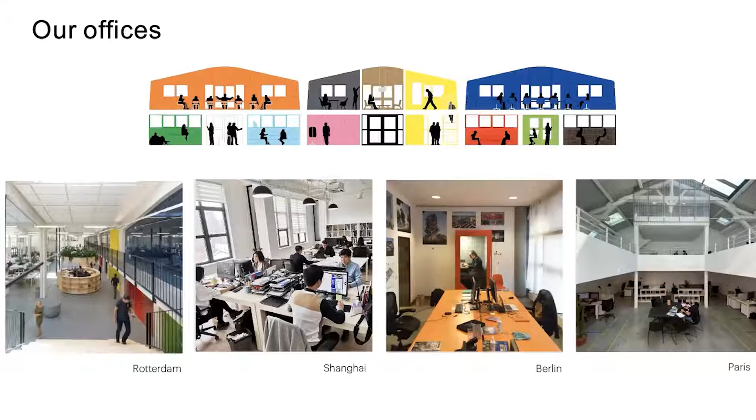So why not try to be very inclusive in my presentation as well? So therefore, I chose the topic of data, density, and diversity as some of the main drivers of our designs in many places. Actually, we are an office that started in Rotterdam, and in the meantime, we've opened offices in other cities as well, like Shanghai, Paris, Berlin, as you can see here. And our very colorful Rotterdam core offices are today also the background of my Zoom screen.

So first, the three Ds, the triple Ds for my title: data. Why is data so important for architecture?

Well, obviously—an image I often show—it's everywhere, it's in everything, we are using it, it's also partly using us, so we have to be critical about it as well. But whatever happens, it's part of our life.

Also, a wonderful image I often use—it is also in our construction world already very much. And to the right of this image, you see future-proof design and construction, designing with materials and methods of the future. It's an important aspect of that. So as a designer, I'd like to talk about that as well today.

But we are, of course, fully aware that we are in a data-driven world already. And hopefully it helps to improve our construction world, because I must say, it's a conservative world and it is often lagging behind. It's hard to change standard ways of working.

Now, our office started 28 years ago, and from the first moment on, thinking about information and incorporating it into our designs has been a very important aspect for us. It's maybe a wish for this pragmatism also that I think Martha was talking about.

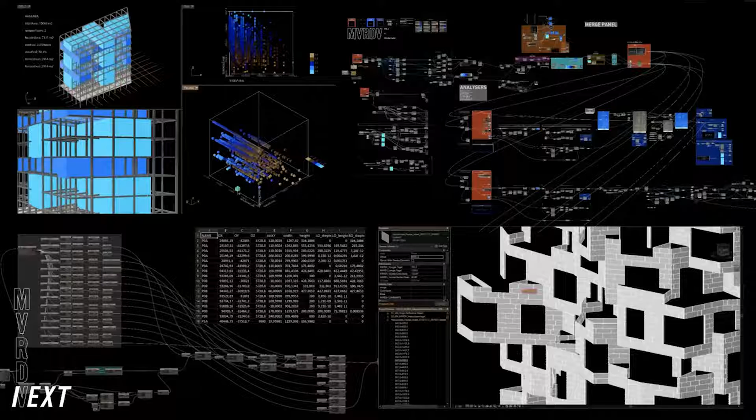Because none of us—I wasn't even in my student years using the computer, only at the very last moment it popped up. And there's many generations of older architects that haven't even been introduced to it. And nowadays we have generations where, well, I guess even toddlers already have screens in their hands today. So it's a really rapid paradigm shift we are dealing with, but it gives us wonderful opportunities as well.

The second D: density.

Why do we have to think about density? Well, the Netherlands is a densifying country, that's probably how it started. But we know that the majority of the world's population is nowadays living in cities. So how can we make our lives agreeable and nice?

Cities are maybe only occupying 2% of the total land, however they're producing our wealth. That's good, one could say, it's a sustainable way of using our land. But they also consume a lot of energy.

Cities, but also the construction industry, unfortunately, are producing a lot of greenhouse gas emissions. We as designers can play a role in limiting that to a large extent. So there is our responsibility. But also...

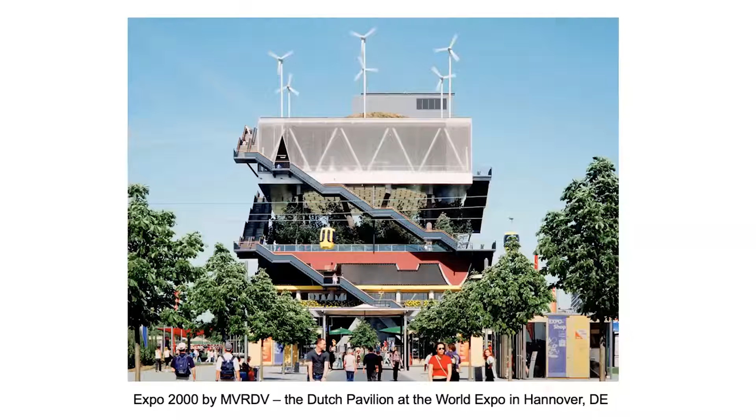I always show this image in my lectures. That means we have to think inclusively about our designs. We shouldn't limit ourselves just to 4 walls and a roof. We should think about materialization, about energy, about maybe creating cycles.

As Imagineers of the future, in 2000 we built this then-hypothetical pavilion at the World Expo, which nowadays already looks a bit out of time in a funny way, because a lot of things we did there that seemed spectacular are now common practice, with high green on buildings and energy-producing buildings.

The third D is diversity, which I want to show in my little lecture, and diversity is also for me personally an incredibly important topic. We are all humans, we all have our common needs and individual needs. We need to think about the needs of those who can't speak for themselves.

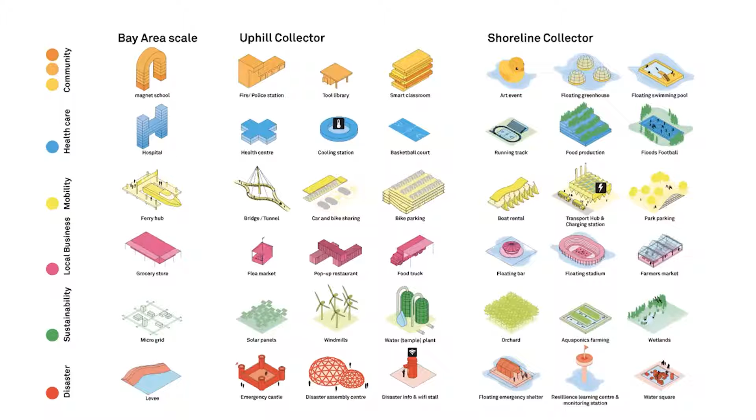We know there can be earthquakes there, but there's also the threat of sea level rising, and sometimes too much water coming from rainfall. They have fires, and the idea was to develop a catalog of facilities, because there's also poverty in the area.

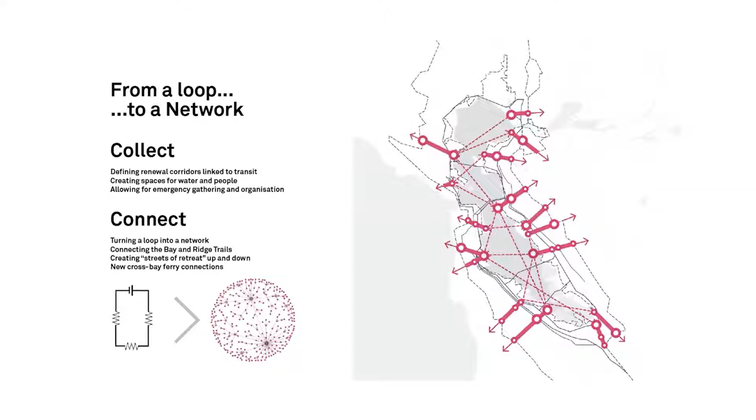Our idea was, let's make more connections and let these connections be made together with the population of the different communities living around the Bay Area. These new connections could help make the whole area more resilient against climate change, poverty, and all these kinds of things.

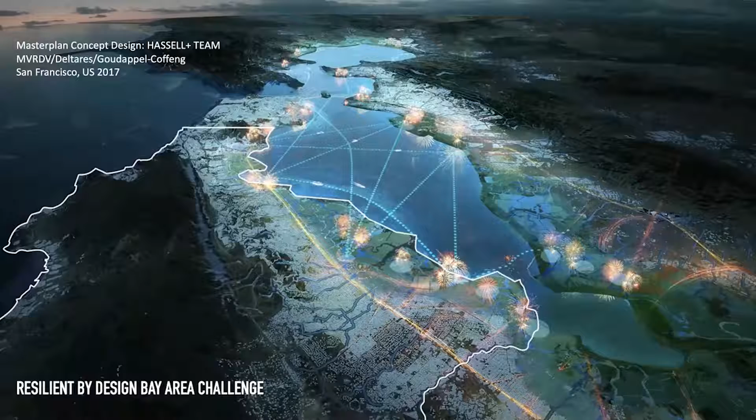So basically, we wanted to devise a network of connectors and collectors—connectors between people, more different modes of transport, so as not to just rely on the car and the one highway. When there's one crack in this highway, nobody can get anywhere anymore.

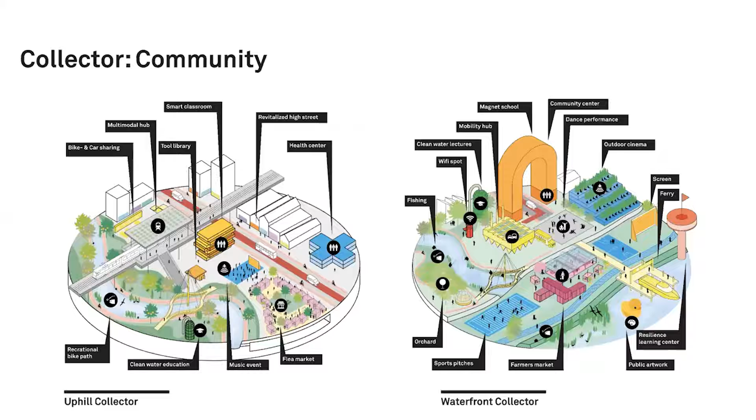But also collectors to collect the water and move it downwards in a better way. Together they could form a way to escape to safety in times of disaster. And all these new connections could also be exactly those points where we could make new community facilities, selected together through communication with the population.

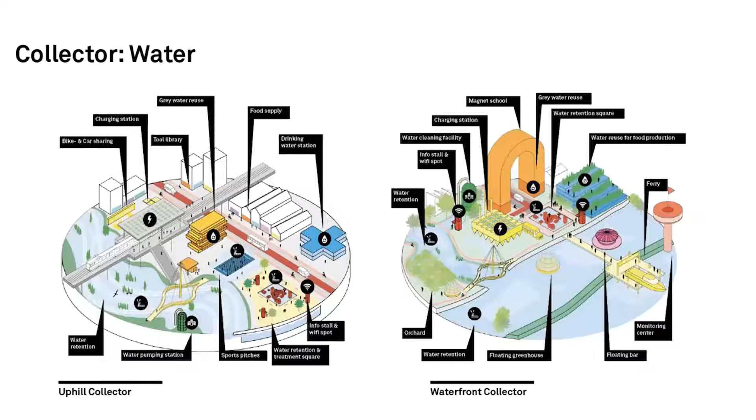So you can see that the whole system of water collection and connecting people could handle and deal with, and make a whole area more resilient against disaster and climate change.

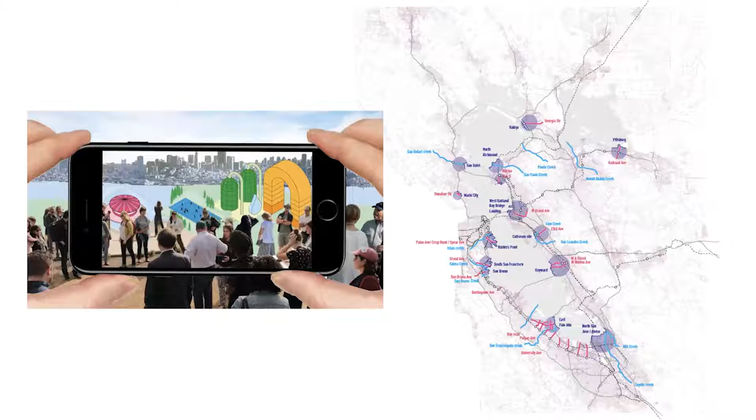So altogether, as designers, we are designing a systemic way of thinking, learning in fact from digital networks, to make sure there are much more shortcuts and ways out of and into the system, and at the same time offer possibilities for communities to intervene and select their own facilities around these new networks.

This is really huge scale design. So here you see some of those communities around the city of San Francisco.

Another thing with communities, diversity, and the digital—we experienced this in the past year when we were invited to make a master plan for this area in Kansas City. We were invited by the Office of Port, who have a wonderful track record in very interactive, community-based design processes.

They invited us, but it was also during all kinds of lockdowns. We were not able to travel, and locally the people weren't allowed to meet up a lot of the time. I show this project because I think, like the previous one, resiliency against disaster and flooding is a global problem.

The same is true for this area called Armourdale in Kansas, which is completely surrounded by industry and has a problem with poverty and negligence—something we find worldwide in cities today. There's also again the risk of flooding; you can see this big river surrounding it.

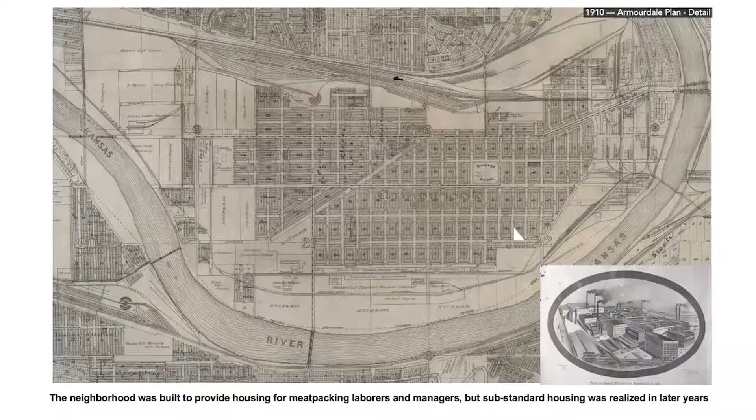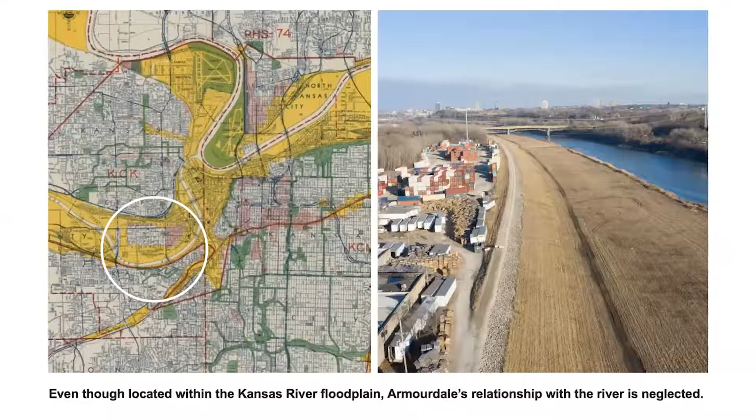It was once developed as a nice kind of worker area for the factories, to make sure the laborers and managers had a home. But it turned out to become a very isolated place, and the industry became much more important. The people were more or less left behind, and even their relationship with the river was completely neglected.

So this is the diagram of what was happening there, and you can imagine that it led to extreme difficulties as well. So how to deal with this?

The neighborhood is sort of completely enclosed and bordered, almost strangled by the industrial complex, leading to a lot of poverty. On the other hand, it's a community with a very strong identity and still a strong cohesiveness that you can make use of when you work in the area.

And what can we add as designers to this issue? So we investigated what are all the issues that have to be dealt with and solved in some way, and whether we can help stimulate it through the organization of space, but also by empowering people to get out of this deadlock situation there.

And the most important is, of course, talking with the community. In education we have to make sure this finds a place: engaging yourself, talking to people on site, getting to know the people you're working for and with. In this case, it was done through many different channels with outreach teams on site, surveys, websites, workshops, talking to community leaders, interviewing people, having them fill out forms spread in the community. We also organized workshops about public health and safety.

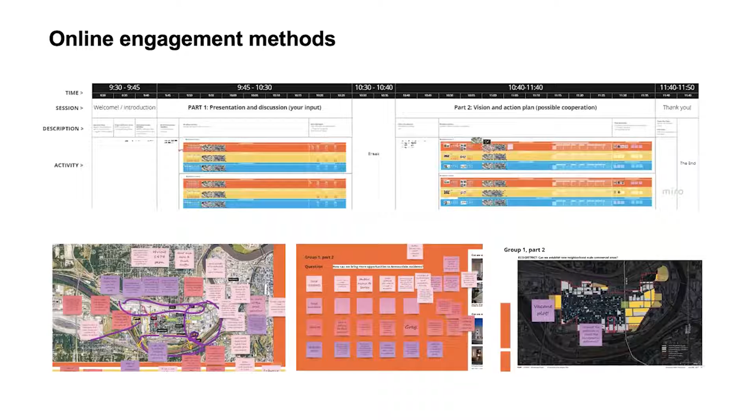And we used wonderful techniques like Miro boards to have online workshops as well. Sometimes there were markets where people from ports could go to, but we also did it online in small groups, gathering information, talking together, trying to visualize their problems using colorful diagrams and photographs and all kinds of modes of communication.

And the conclusions, I think in many places, are important: reconnect, don't forget us, reprogram, empower us. What's going on in this area? We need more clarity from the government, more interaction, green, of course, and safety, public space, community cohesion. How can you do that in a design?

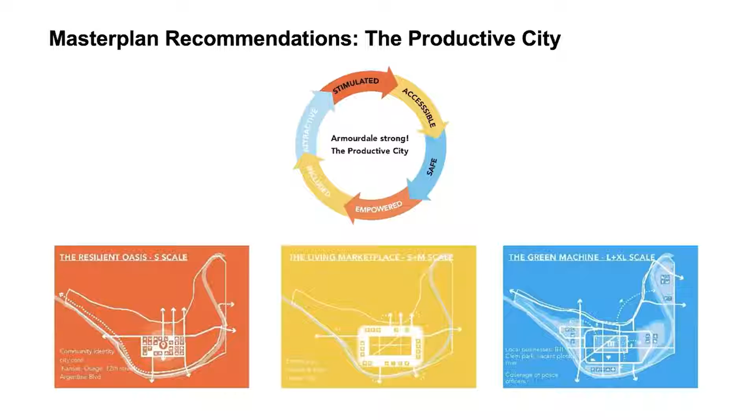What's very interesting, I think, is we come from an age where we have divided all functions in cities a lot, industry on one hand, living on the other. But maybe it's time to think again about productive cities and make interaction between work and living important again, because we can be productive in producing and taking care of our own green.

In the community, like on the left, on a smaller scale, help to build our own homes and empower people to do so by giving simple structures. We can also help people develop workshop-like situations in neighborhoods as well, to educate people and teach jobs.

And the big stuff, we can use it as well, maybe for energy, raising energy on these big factory halls, and using the floodplains for recreation, because they're not always flooded. And identifying the voids, literally, in the community.

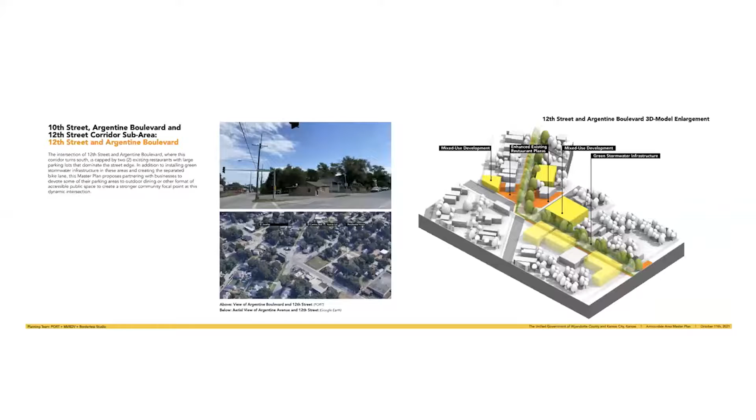We need public spaces. We need to rebuild on important spots in a community like this. We have to identify that and make sure that people not just make new buildings, but also new public spaces. And when you create housing projects, there should also be places to meet in front of that.

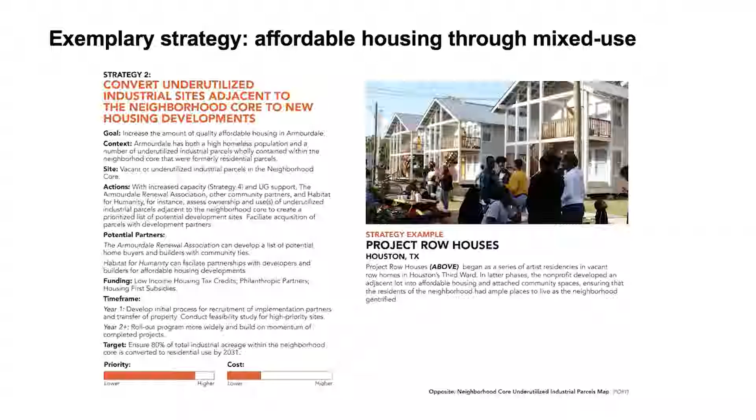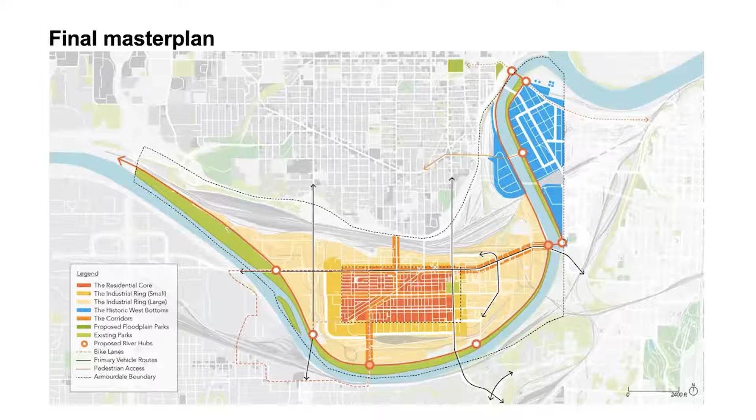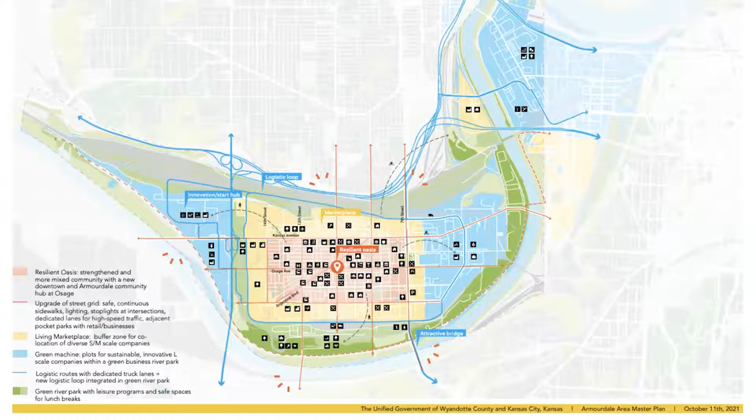Indeed, also the connectors and collectors in the circles on the waterfront, include the waterfront in the community. It can be used most of the time as a wonderful park. And then suddenly something which is like a backside becomes almost like a front side of a city again.

But this is something which works on so many different interactive levels with so many different specialists working together. Can't even begin to visualize it. I guess the best visualization will be in some years, when the community starts to function better again.

Moving on to dwelling, another scale I'd like to show you, because that's also an important place where our growing world population, data-driven design, and density come together. Data-driven design for us means that we are more and more able, as designers, to include important elements of our daily life, not just through consultancy, but also in our own design process, as part of how we create and densify neighborhoods for many of our projects.

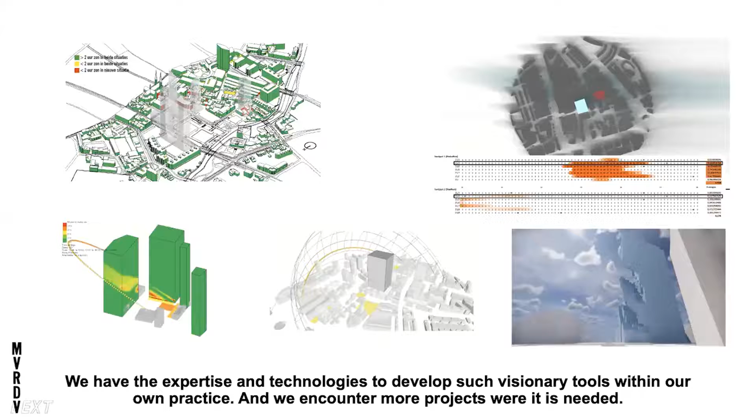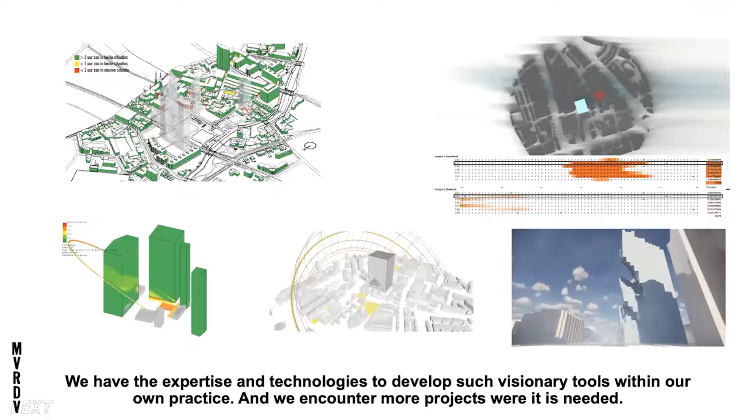Maybe you could also use it in a different way, because in some areas of the world we also need shading, not just nonstop sun. This is an interesting parameter that should be very localized when in use. But you can see how, through different techniques and applying different data sets, we start to shape our environment with sun hours, sun spots, aims and goals, how to deal with sun and create buildings that better cater to that. On a practical level, we did this on a large site in Bordeaux.

Our office made a master plan for this former railroad yard with factories and some housing as well.

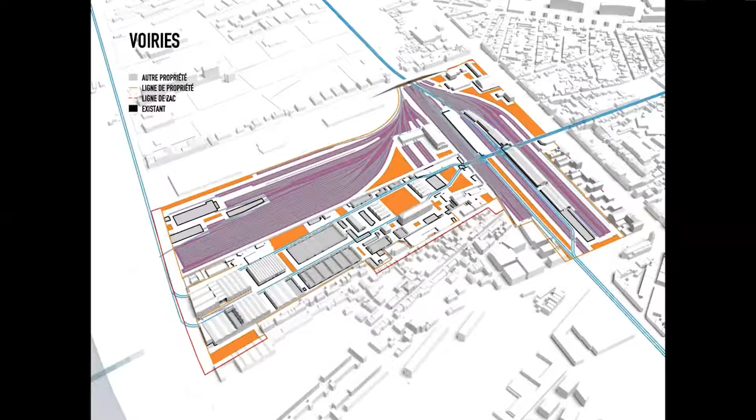You see how the different layers of data we're now putting in, it's the original French presentation. See how we can start to build buildings on the former tracks. We take out spaces to also have public spaces. We reconnect it to the streets and the context.

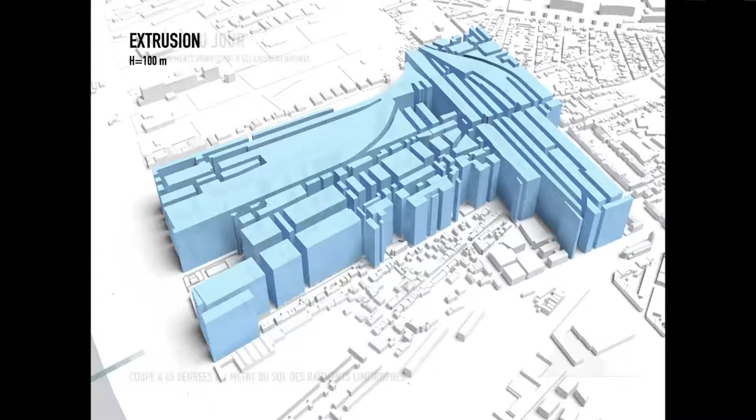Then we just start with a kind of massing, as if we start to create a model. Rough blocks are put on, and then we start to carve it out to get enough light on the streets, on all the buildable areas. Of course, there's existing buildings included.

We even put on minimum daylight measurements. We contextualize to get views and context to include the existing buildings as well and give way to specificities. 144 architects will be invited to create a really colorful, diverse scheme to fit into the master plan.

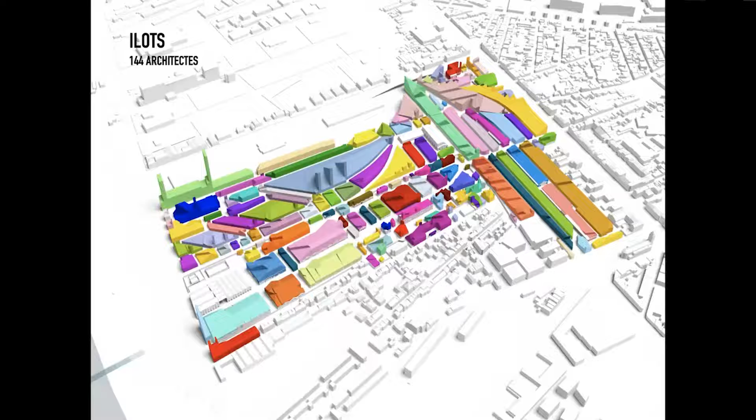And of course, we don't make massive buildings, but we're also opening it up for air and light inside as well. And we'll add a lot of solar panels and some other ways of creating energy, and green roofs also can be an important aspect of the designs as well. Not to mention underground, the water collection as well.

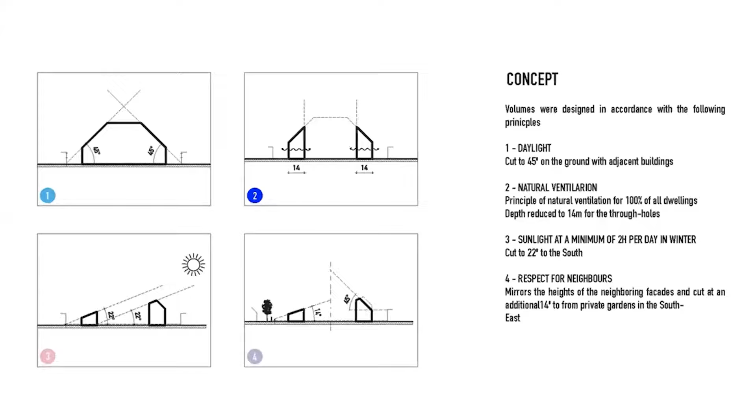So that leads to sort of manipulations of massing and careful studies of all kinds of these aspects in the sections. But it also leads to actually new data-driven design of architecture.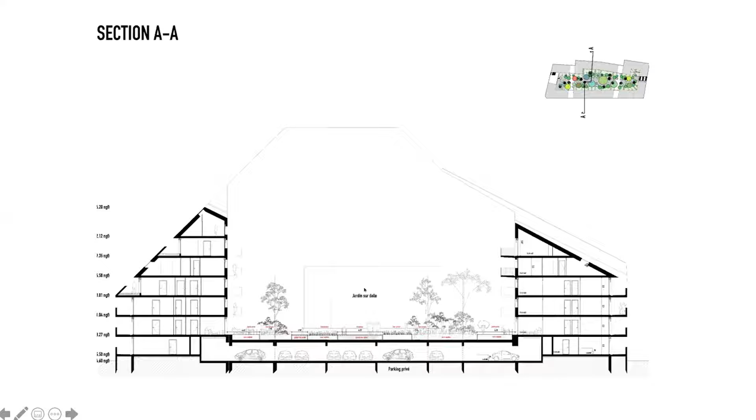Get rid of the cars, important always, but also make sure there's enough cover on the car parks to have green courtyards as well. As you can see here, in this block, of which we are also the architects, there are different types of apartments, including almost half of them affordable housing.

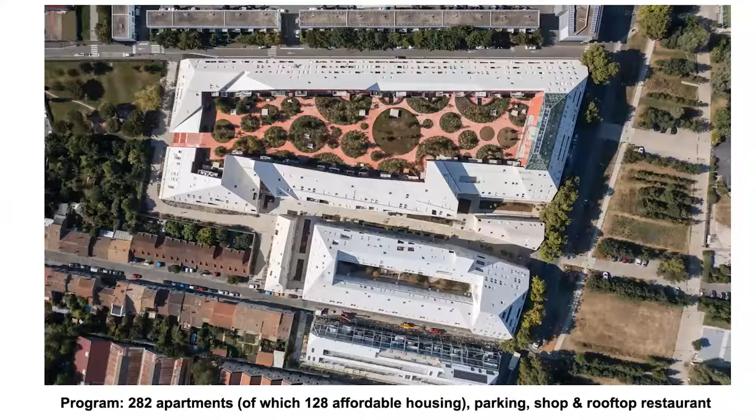There's a parking, a shop, and a rooftop restaurant as well in the glassed parts. We're opening up the blocks. You start to see the diversity, but you don't start to see who paid what for his house and in what financial structure. So that's also very, very important.

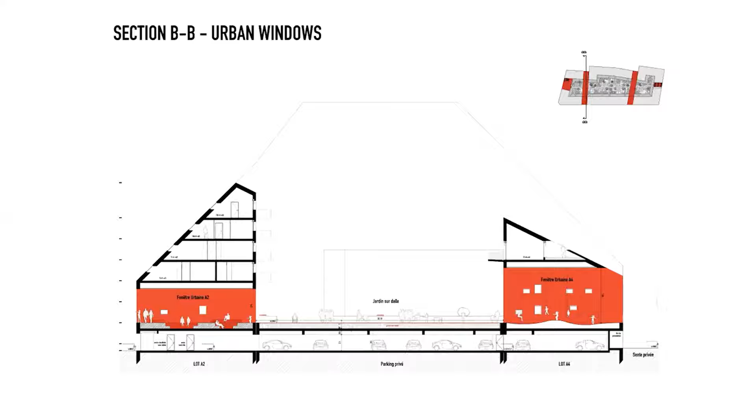And we make a lot of collective spaces as well. So some of the entrances and gates become playgrounds and covered meeting spaces in the project as well. So data, diversity, density coming together.

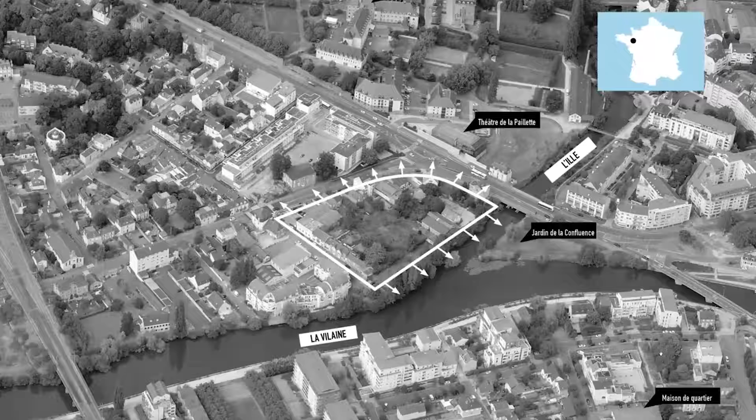And in another project in another city in France, Rennes, the capital of Brittany, some of the same measurements, densification, but at the same time allowing views through and across the project, making as much as possible outdoor spaces here and balconies and green. Again, a mixture of different financial categories, from social to mid-income and regular.

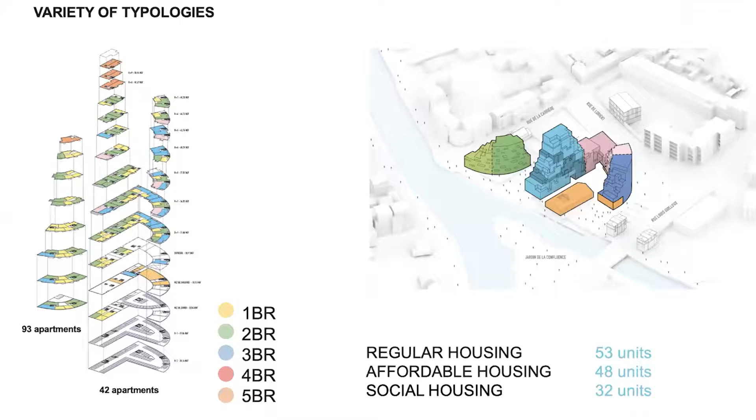Expressive shaping that leads to a very big diversity of floor plans and layouts and different types of amounts of bedrooms, from 1 bedroom to 5 bedrooms, for example. I'm not going to go through all these steps in the design, but again, this sort of shaping with information is an important aspect of how we create these buildings.

They're also wrapped around an existing little hall on this canal. It's close to the downtown of Rennes, a historical place. And here you see how actually everybody in the project will have a wonderful view, have a balcony, no front or back rows here in this project.

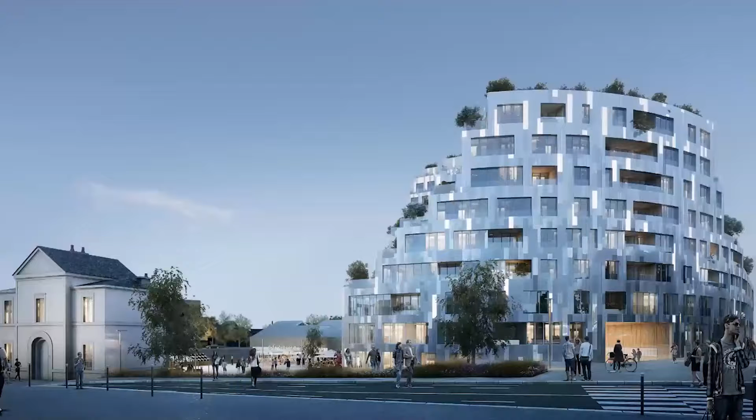And again, this permeability with collective open void spaces, which always allow a fantastic place also to meet, to organize a neighborhood or a block party or meeting as well. So it's just void spaces, but they allow, and it's under construction right now as you can see, a nice public waterfront, of course it's not privatized here. Allow for little places to meet in your project.

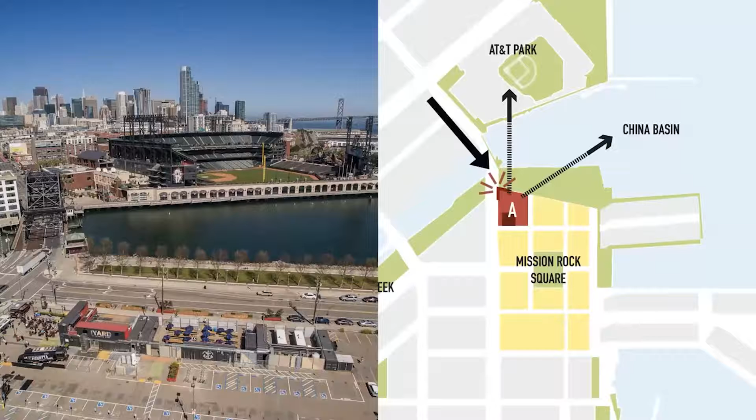Moving to a different continent in the States, a project for the San Francisco Giants, their parking lot being converted with different architects. Here it is actually a couple of months ago. It's already much further ahead in the same Bay area. Indeed, a flood park in front of it now to prevent it from being flooded.

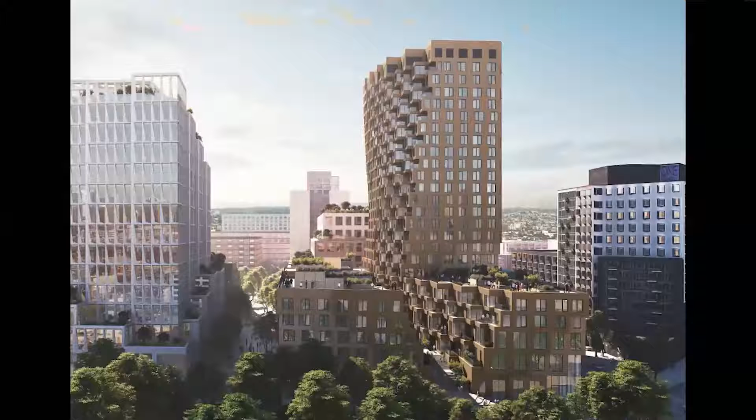4 architects, studio gang coordinating, Henning Larsen, WORKac, and us with the reddish building in the front tower. But we opened it up, we carved it out. There's offices in it as well in the plinth and retail, but also at the heart and at the roofs, places to meet and to talk to each other.

Again, with different floor plan types for different types of people, also affordable.

This is very important for the San Francisco Giants. They say all our fans should be able to live in this complex. So it's really something that the client should also take care of and include in the programming.

So this one's under construction. I'm not going to talk about it too long, but it's also very mixed with a plinth of retail, some offices, living all together in a quarter.

And yes, we also made a project in India. We made several projects in India, a lot of them about public space. But this one is for housing in Pune. This is the building. There will be some more, I think, in the future.

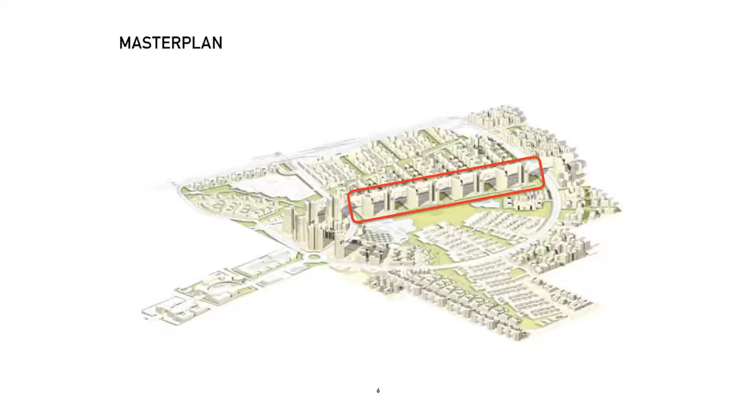As you can see, quite a particular organization. The original master plan asked for a couple of towers, which we thought was pretty isolated way of living. So we devised a way whereby we could create a bit more, even with tall buildings, a sense of community in the area. And we also talked with the client about, again, the mixture.

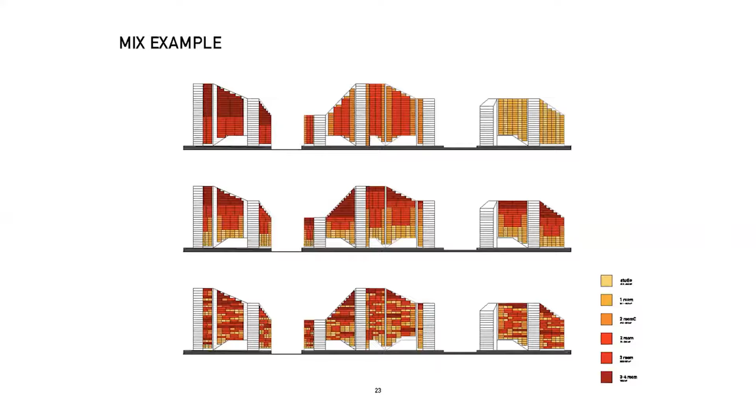I think the different colors represent the size of the apartment. And we started to negotiate it, and the marketing team of the project also helped to diversify and mix and mingle. Because I think if you mix and mingle different housing sizes, you also get different kinds of people in your buildings. So here are eight apartments, but they're all very different in size.

So you can imagine that different types of people, like singles and couples and families and extended families, would all be living in this particular part of the building, for example. And you also notice, of course, it's put on top of a car park.

There's some half enclosed plazas and facilities, but there are also these openings in the project, these sort of collective living rooms, because if we make a building so large, it doesn't really help just to make a couple of openings on the lower levels. We really wanted to integrate them as well on the higher level.

So you will be able to meet some of the people from your surroundings and area in particular places, which also have different functions, like collective living rooms in the project, including, of course, some playgrounds, some places to meet and talk.

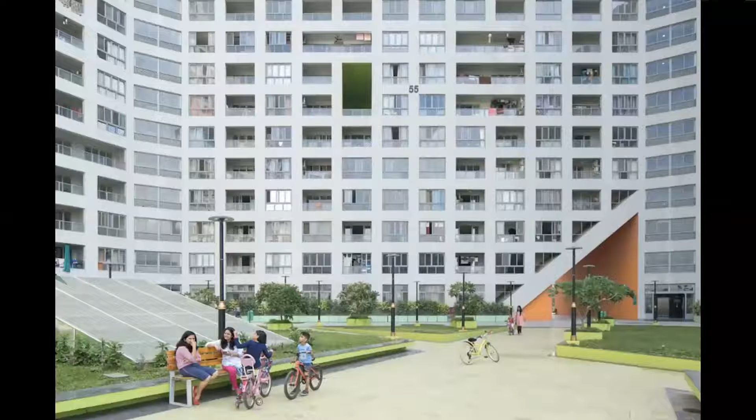And also, again, at the lower levels, there's some nice outdoor design here, but there's also covered spaces like this one here, where you can see a class moving towards the playgrounds. Yeah, just a place to sit and meet and hang around in the shade, of course, as well.

So you can see here how this building is. Yeah, everybody has balconies as well. Things we try to get in every project all around the world.

I'm continuing, I'm a bit behind schedule, so somebody should give me a sign on how much time I still have left. I'll just keep on talking. Not an issue, Nathalie, I'll do that. Please continue. Okay, thanks. Well, I'm in the third part.

I think we also have to talk about work in another way. We had in Armourdale, of course, already the industrial, let's say re-industrialization, bringing work in a nicer way back into the community, having workplaces for everyone.

Many of us are also office workers, of course. And so much has changed also in the way we are thinking about work. It has been in the past, but it has even been accelerated in the past two years.

We were very happy to make this building to the right called Werk 12, which is like an office workers club in a way, to liven a neighborhood near a station in Munich, where there will be a lot of offices built, but also a lot of housing built.

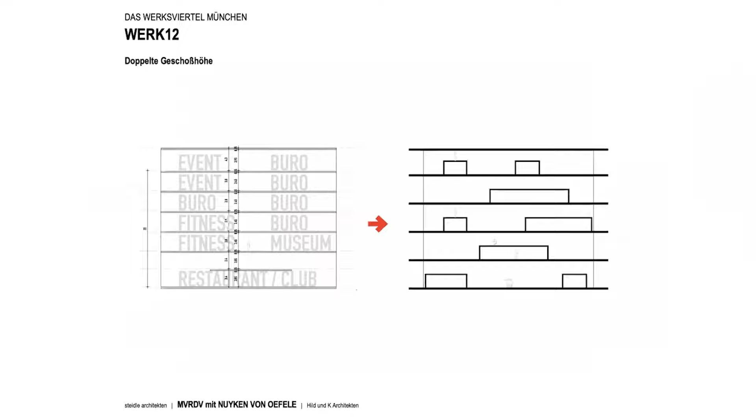Including offices, event spaces. And we even know, of course, there will be different floor to ceiling heights there. So we suggest sometimes to take this double height as the point of departure and put other functions in more as infills that you can remove. You have different lifespans in the construction of a building.

This is really the open building system. And it can still be very fun. So it looks kind of rough and ready in a way, but it can also be a lot of fun if what's happening inside is really showing off and buzzing on the outside.

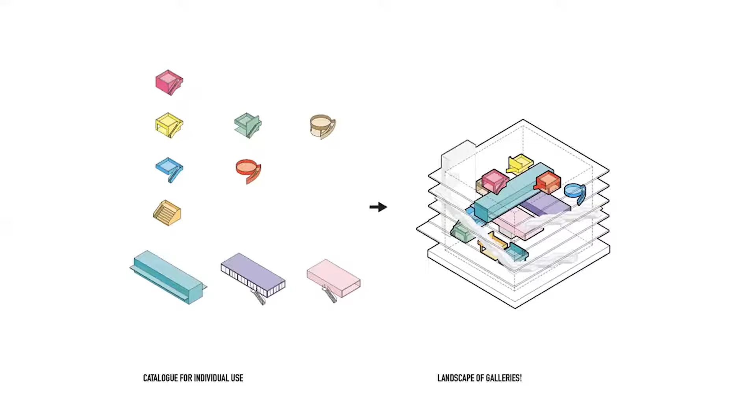This is a building with even multiple points of entry. These are the infills I was talking about, almost like pieces of furniture for functions that need some closing off in the bigger spaces.

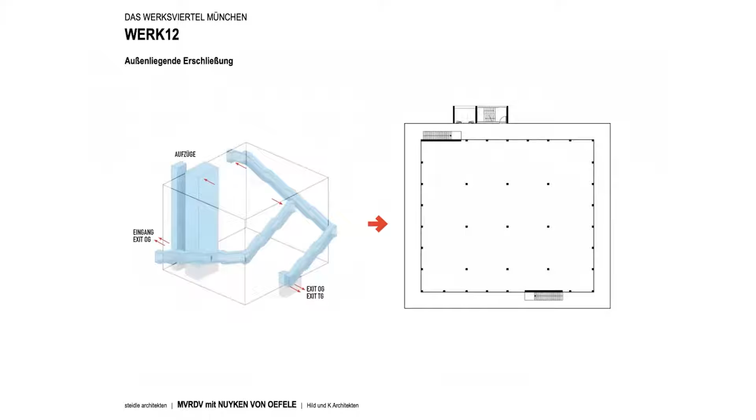We have a point of entry, which is kind of a gallery, but the escape routes are also alternative entry points so you can really access the building from all kinds of different sides. The sports inside, offices, swimming pool, restaurants. It's a really neutral floor plan with columns and these galleries. Each floor, like the ground floor, has two floors because there's the basic floor and the infill on top of it, all with the idea that it can also be flexible again at some point.

Continuing, we even managed to include a swimming pool in the equation. Of course it's also an attractive building where the people living and working in the area will meet and come together, to also offer space for the nicer, relaxing things of life. It's like a kind of commercial community center, one could say.

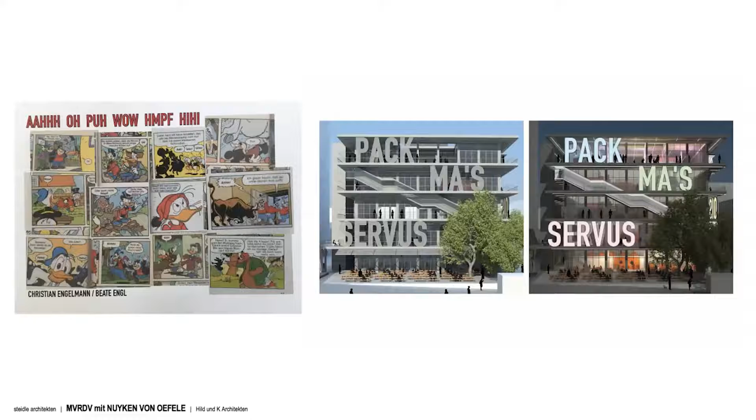You've of course been noticing all these letters. It's part of our original competition design. Two artists, Engelmann and Engl, said it reminds them of what you see in Donald Duck, these sorts of noises that are sometimes made, and why not include that on the facade, because it's like a universal language. It's really wonderful to have that now in our design.

We collaborate a lot with artists because we think, on the one hand, we try to be very basic, neutral and transformable in our designs, but we also need joy and fun in our lives. Often the artists and designers we collaborate with, and the use of color, are a very simple and very cheap way of making life nicer, and are part of our designs.

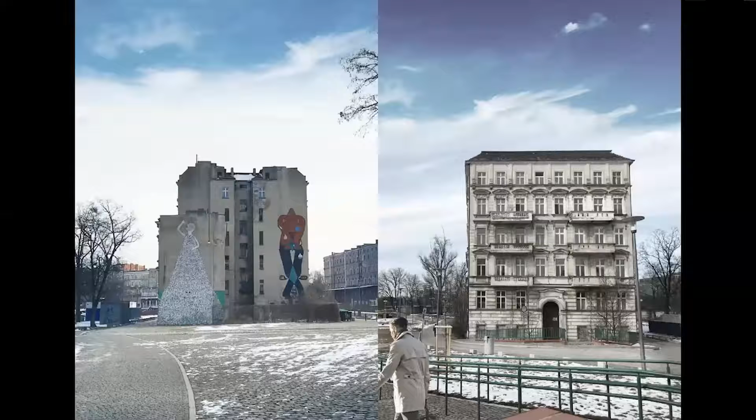So the second working building I'd like to show you is this one, which starts in Wrocław in Poland, on an island where the Nazis in the Second World War retreated and used it as a kind of bastion. Everything was broken down and shut down, and there were just ruins left in the middle of the city for a long time, until we were asked to deal with this one of the last remaining fragments of a building, which, by the way, contained fantastic street art at the same time.

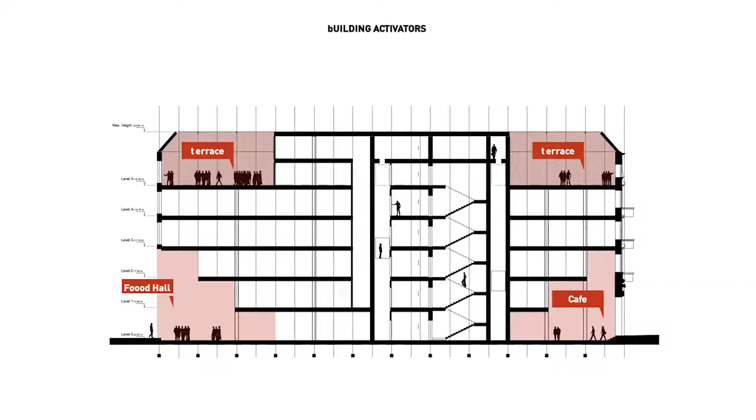We added a commercial program of collective co-working spaces, restaurants, and meeting places, while also acknowledging that it's really a central meeting place in the city. So not closing it off - in a way an office is a closed shop for those not working there, but in this case all the pink areas are retail, cafes and meeting spaces where there will always be people entering.

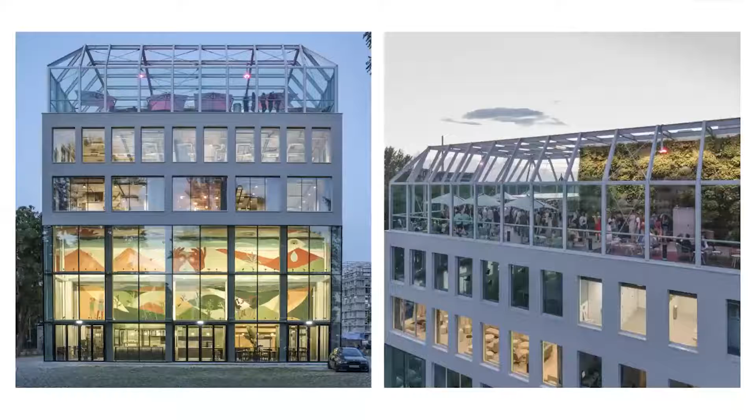We did that on both sides, the new and the old part of the building. You see a bit on the roof here how we opened that up. At the bottom, a new hall where you see the old and the new - this is an event space - and on the other hand our new part, with a fantastic rooftop cafe, green roof, and a wonderful space to eat and drink.

Co-working offices are very important. I think nowadays many of us are freelancing or working alone, but we also like to meet again, so co-working is becoming ever more important in the city, and finding places for that. But also a social place - you work there, you drink a coffee together, and you meet not just indoor but outdoor as well.

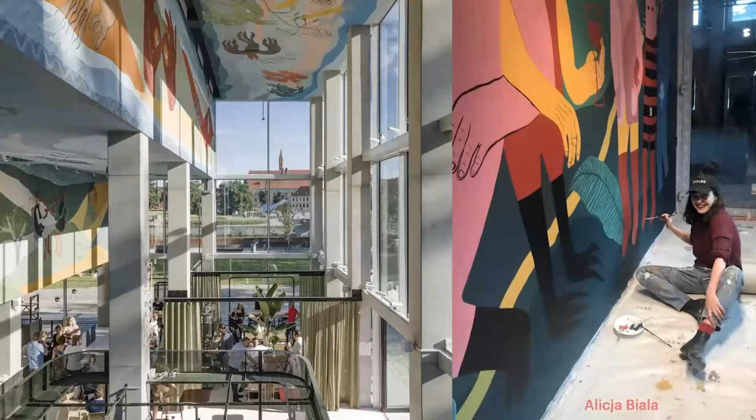Here you see a bit the island situation. At night, actually, the youth takes over in Wrocław. So at daytime people work there, at nighttime people have a lot of fun there as well.

A third office building in Colombo, I thought I have to show you this as well. We worked in Sri Lanka on a new office building in an area that's rapidly transforming. There's still some of the old remains, a factory owned by the family of our client that transformed it partly into this nice area to go out as well. But there's also all these towers popping up in the city at the same time. So what we did is we tried to connect with our scheme these alleyways with the new nice activities to the new building we also put on site, but also save space as much as possible because there's still a lot of green. And we thought in our site, we have to find spaces for that as well.

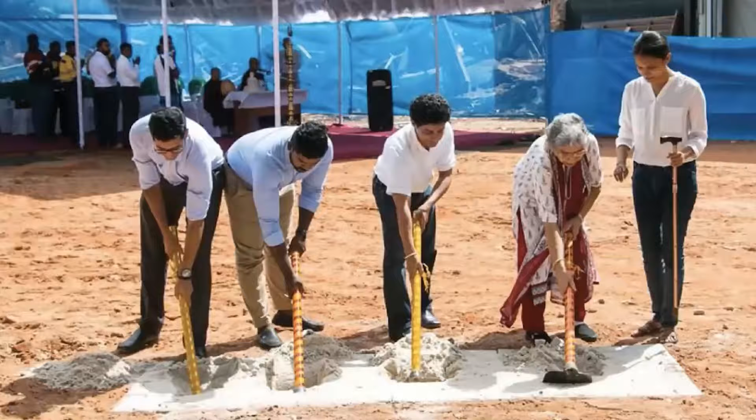The client introduced a rooftop as well, and on the first levels we have some car park also on the ground. But we designed it in such a way that it can also be converted to offices once the car is less in use, so the floor to ceiling height is higher. Currently we green it, but it's all ready for transformation. Then you see, of course, these closer and opener parts of the building. You see the ground floor and the greenery that we added, and again a lot of artists and architects involved, making these wonderful artworks and interiors.

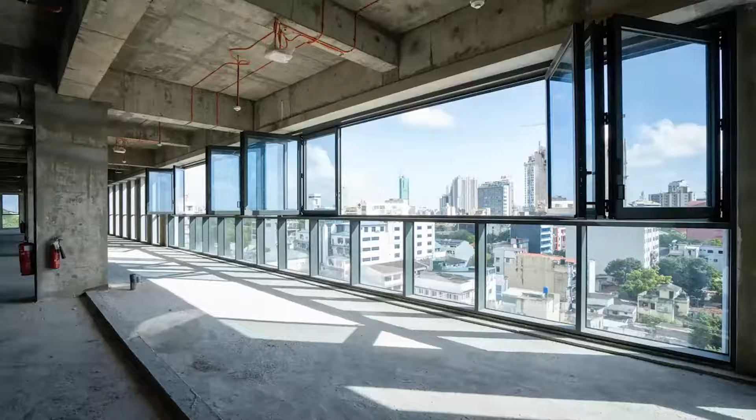Here you see the office floor currently used as car park, that's how I would like to label it, with the provisions for the green. Each office, this is the rough, unfinished version, with a lot of opportunities to still open up and create maybe verandas, not to be totally reliant on air conditioning every hour of the day, and indeed outdoor facilities as well, which could also be this sort of co-working space, and a building that also communicates at night and is lively for the neighborhood as well.

Right, and some other images from the context. I'm moving on to the last buildings. Again, I'm just continuing until somebody stops me.

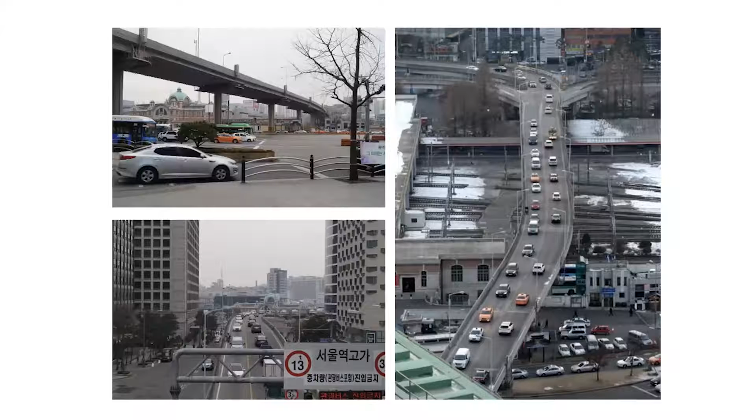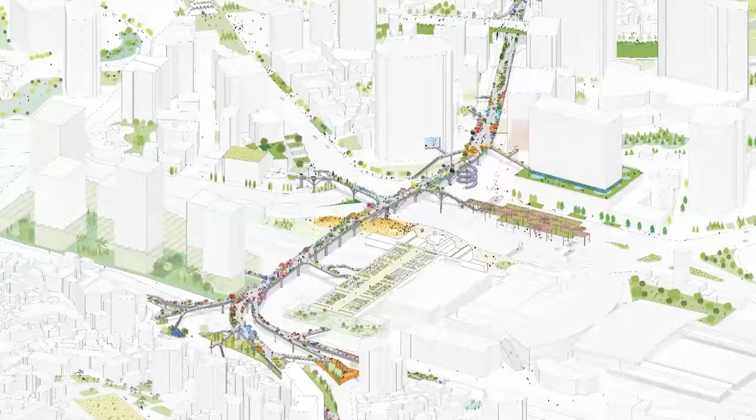Last but not least, I'm going to talk about some public projects. One in Seoul, where really in the heart of the city, across the tracks but also highways, a piece of highway was actually taken out by the city, and they said we're going to just take that out and transform that from a car-infested place to a place where people can bridge this incredible gutter of infrastructure. My colleague Winy designed this whole wonderful park on top of it, which acts like a sort of nursery for plants in the city. A nursery of plants, and when they have grown enough, they will be put in other places in the city.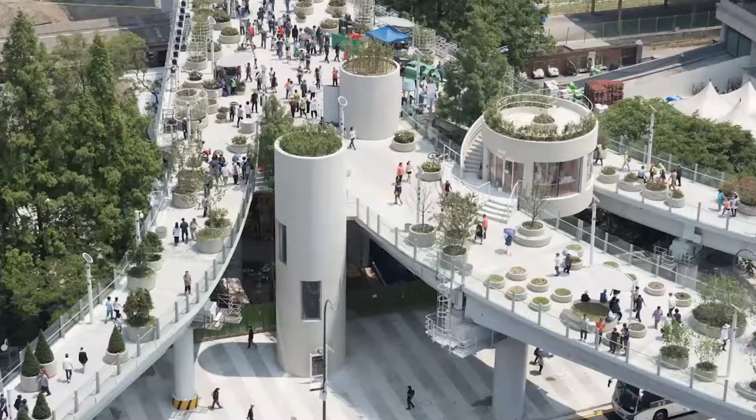It's like a catalog of local vegetation, and there's all kinds of pavilions. The design was basically the park and all the elements to get up and about and around this place. And it has, like its big ancestor, the High Line, an incredible, powerful impact on all the real estate in the surroundings. But also you suddenly see that people are actually living there in that area, and they're not in their cars, they're not shoved aside on the streets, but they're taking over in a wonderful way.

And through these new connections, this whole area is revitalized. From just being offices and shops with people living on the outside, they are back in the center of attention. Of course, the green is fantastic as well, adding shade and better conditions for living in the middle of a huge city, with water as well, and also safe at night and accessible.

The French had this saying in the 60s that under the pavement is the beach, and the revolution started. But under these pavements, we've actually moved it around now. No, the beach is floating above the streets. It's in the sky.

Again, community building is incredibly important. I was talking about mixing different types of people in buildings. In this community in Copenhagen, Denmark, the community said, we're going to densify. There will be lots of new people living here, but there's also people from the really old neighborhood, from the 70s, and all kinds of workers. Let's build a community center right in the middle of that. This is the community center and a park, with a car park underneath.

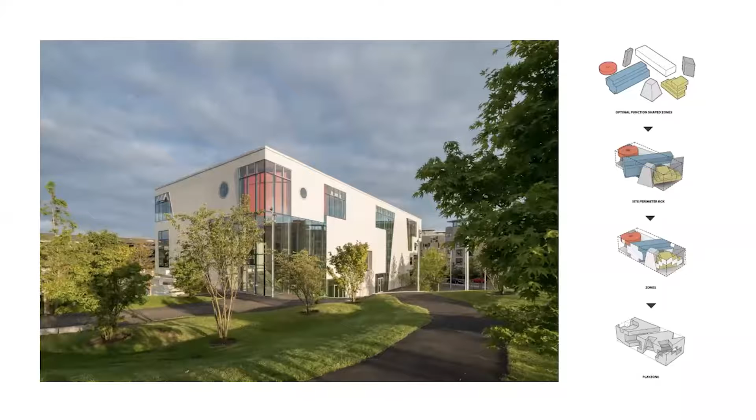In this community center, it's all dedicated to healthy living for your mind and your body. There are different kinds of programs inside: a bit of a startup place, a communal kitchen and cafe.

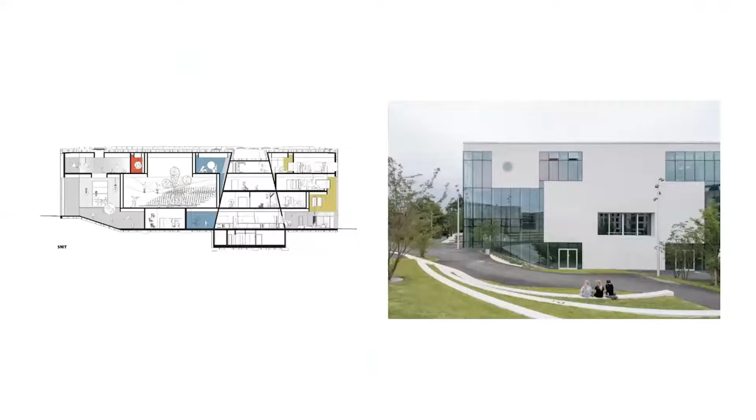You can play there. It's very dark in Copenhagen already at 4 o'clock in the winter, so children can go inside. People can meet, have yoga classes, move - that's also important. Climb, have fun. So all the people in this community from different backgrounds will be meeting each other inside and outside, with a small amphitheater as well.

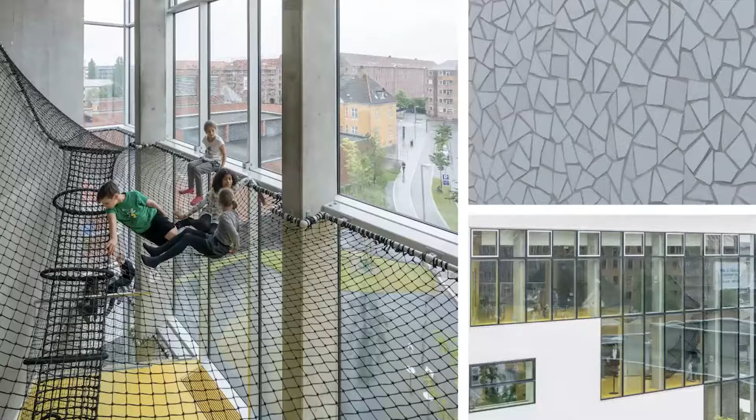So the building is really interactive, one could say. Promoting healthy food and movement is important, because so many people have issues nowadays with their weight and with not moving enough. This is just on a Saturday - on a weeknight, Tuesdays, it looks completely different when people come in for classes and yoga. It really acts as a kind of central meeting point, with markets and fun.

But the museum had a big problem: all their Rembrandts and Van Goghs and Salvador Dalis were in the basement with flooding all the time. We also have a climate change problem, rain, groundwater coming up - there's like a €1 billion crisis there. With the help of the public sector and private collectors, a new archive building had to be made, but the museum director had a wonderful idea to turn it into an archive you can actually visit and use.

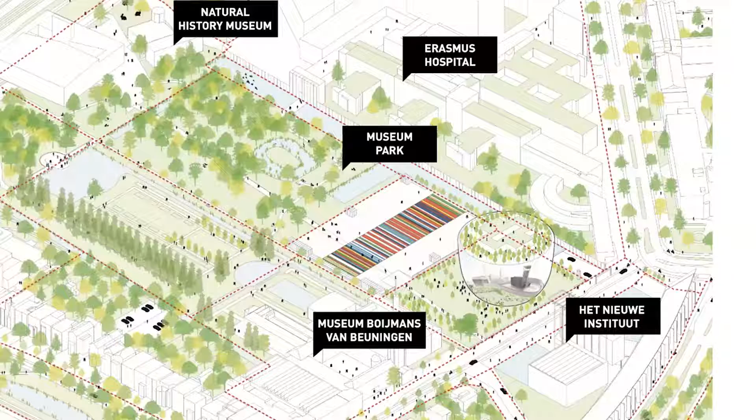We also introduced an accessible rooftop to it as well. So in the basis is, of course, a very closed building with archival spaces that have to be very safe and climate proof, so that the art is protected. But we also opened up the heart for a wonderful Wunderkammer, a place of miracles.

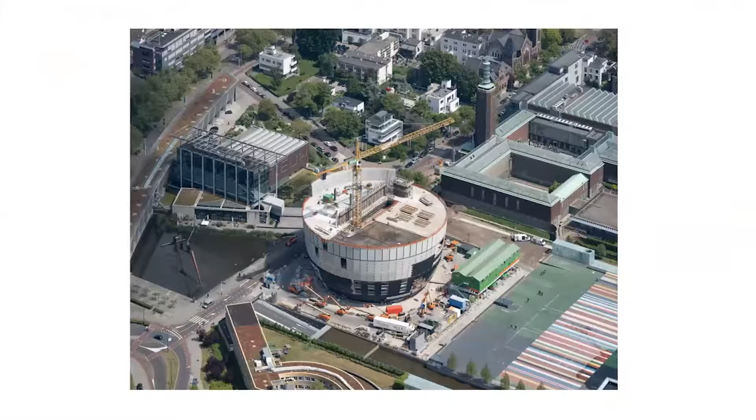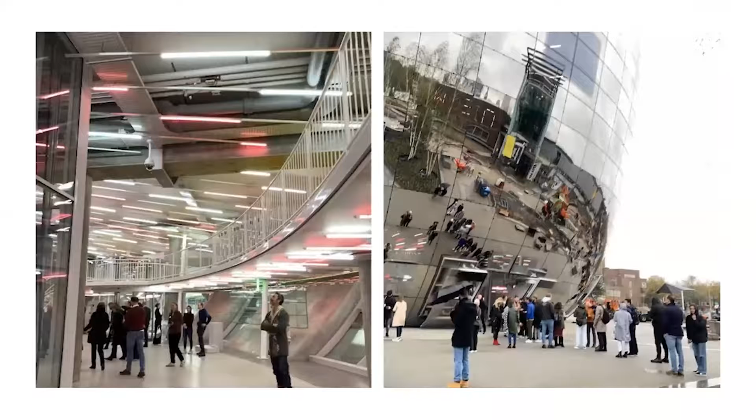Here you see the whole thing under construction - heavy, heavy, heavy stuff, not gonna go into that. It opened last week, Friday, 8 days ago, by our king. There he is, looking up at himself maybe, because the whole building has a mirrored facade to mirror the city and the park. It's a very big, fat building, but because it's mirroring, it also sort of absorbs and opens and is almost away.

Also, again, dreaming - entering through doors that open like a James Bond movie, to both sides. Then you enter into an artwork already, go up a little bit, and then you look up, and there's this sort of Piranesian feeling there, with partly glass floors and lots of objects from the depots exposed and ever changing. You can walk or wander around, see temporary exhibitions - people can show, and collectors are also putting their art in there.

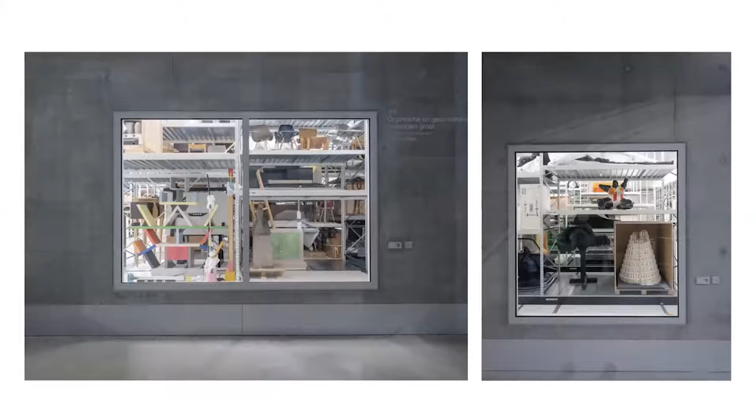You also look into the depots, actually. That's amazing. Now you suddenly see the enormous treasures in the museum. When you put on a white coat and get a tour, you can actually be taken into the archive and get explanation from the people in the museum who are maybe restoring the art.

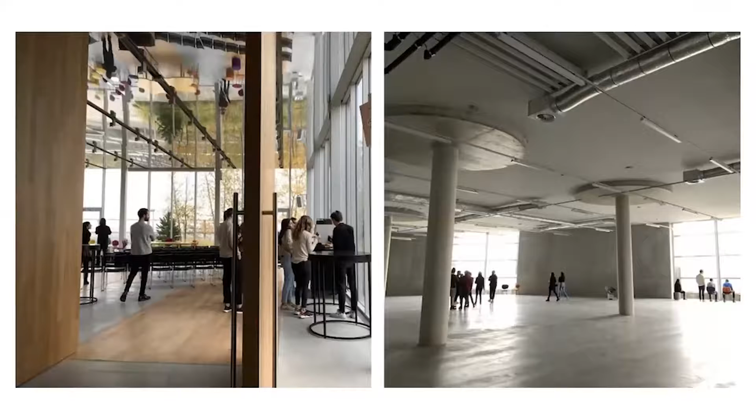You can have a look at that as well, seeing the Rembrandt and billions of euros hanging there, but also areas for events. There's a nice restaurant on top, and every evening after 5 o'clock everybody can go into the building for free to visit the rooftop.

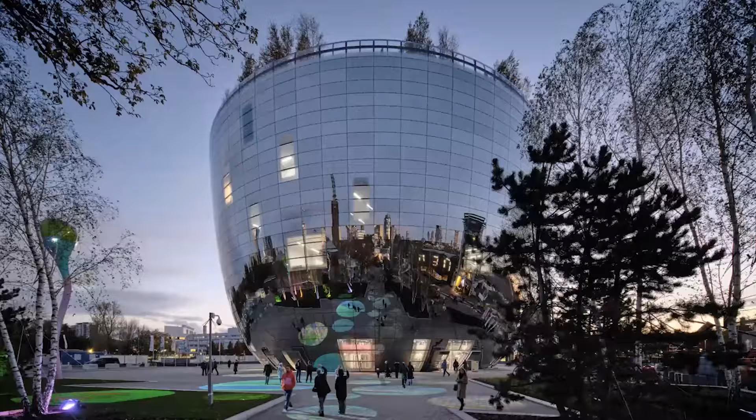And enjoy the views over Rotterdam. Of course there are trees there, specially grown to survive here on the high level, again with the mirror effect to amplify this feeling. And there's a nice new artwork on the outside, also making use of reflections, by Pipilotti Rist, started last week—wonderful projections.

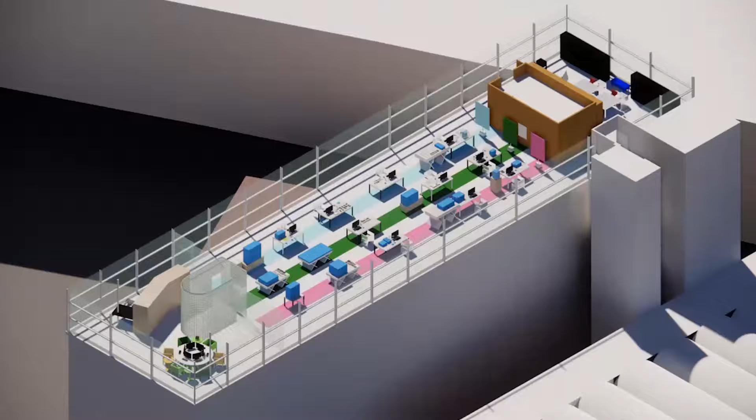To end the circle, maybe the full circle, what was also opening is an exhibition about our own archive. The first 400 project numbers are stored in the architectural archive next to the depot, also with the Architecture and Design Museum Institute. They are looking at our work because we are one of the first born-digital offices, and they want to know how to archive that and how it influenced our design.

So in the design you can sneak a peek into the archive boxes. Our models are dusted off, but there's also conversations with the archivists and curators present. You can see sketches and details of our designs, early models, and also talking about things like I was talking about to you in my lecture today.

But also the old data archives are used for some new interactive installations, so you can basically design your own MVRDV project now—using our own digital past as well in our own work. So all this interweaving of drawing and model making and conversations and data-driven work here at the front.

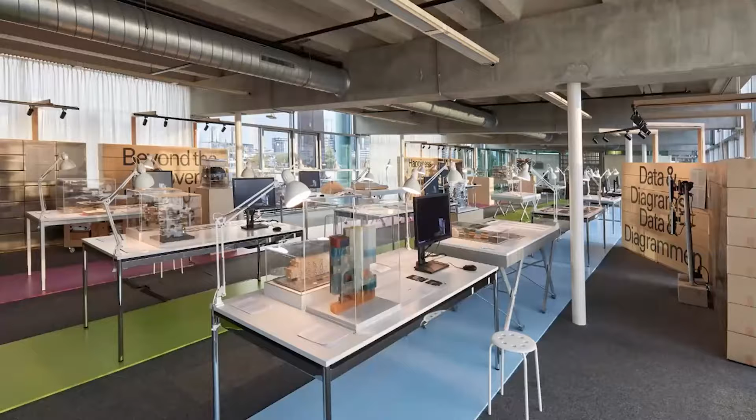That's what will be my last image now: our very first project we ever did together. In front, this high rise with a lot of diversity inside, with a lot of diagrams we made. So back to where I began this morning, actually. And thank you very much for listening to me today.

Thank you very much for this lovely presentation. I really enjoyed looking at some of your projects, especially the one from Pune. I would probably like to go there and visit sometime. And if they stop me at security, I'll say I know Nathalie, so please allow me. So thank you so much.

And we've got a couple of questions here because we've got so many students also present. One of the students is asking: if someone wants to probably work at your studio, what do you look for in a profile, and how can they apply?

Of course, we are using the internet for that and our website. So if this person goes to our website, they will find a way for interns—how to apply, and what we ask of you to do so for anyone who is looking for job opportunities or internships. You can just follow a couple of steps.

Lovely, lovely, so that was wonderful. And there were so many comments flowing in that I think I'm lost in the barrage of comments. But the one thing that stood out was the lovely architecture that you showed, because there are so many monotonous buildings that we see sometimes, which are just even and boring, but you showed some mix and match and so many different diversities that I really enjoyed. I hope people can take a leaf out of that and replicate it in their own areas.